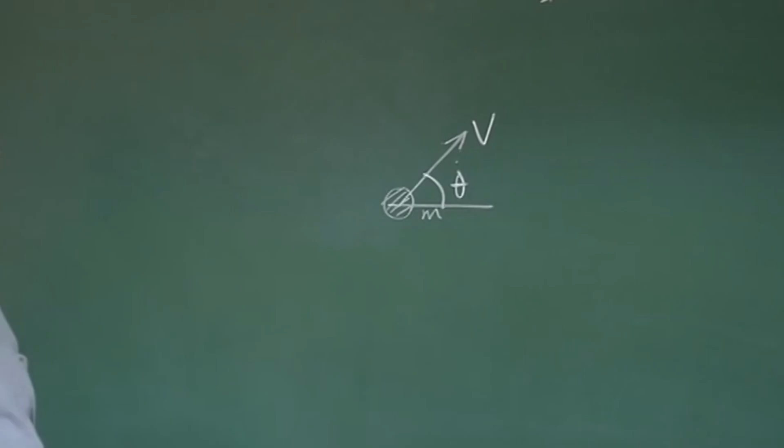Let us go back to the fundamentals, whatever we have learned in class 11th or 12th. If there is a body of mass m, and if I eject it with a velocity v at an angle theta, I know that this is typically an example of a projectile in motion. You can draw this path, and we say the projectile or mass will follow this path. This is typically a projectile motion.

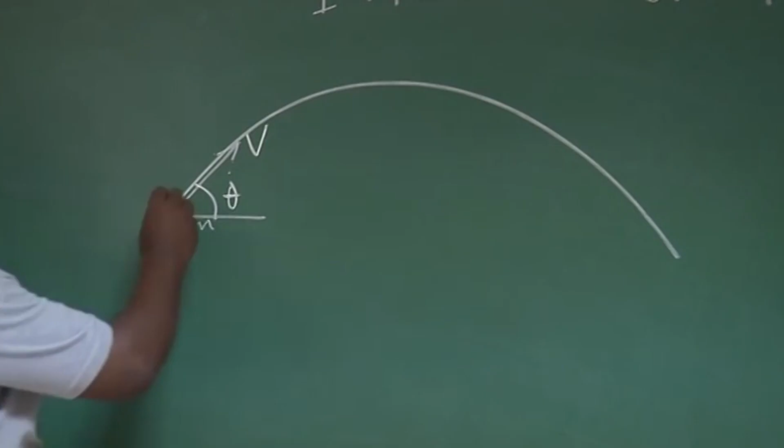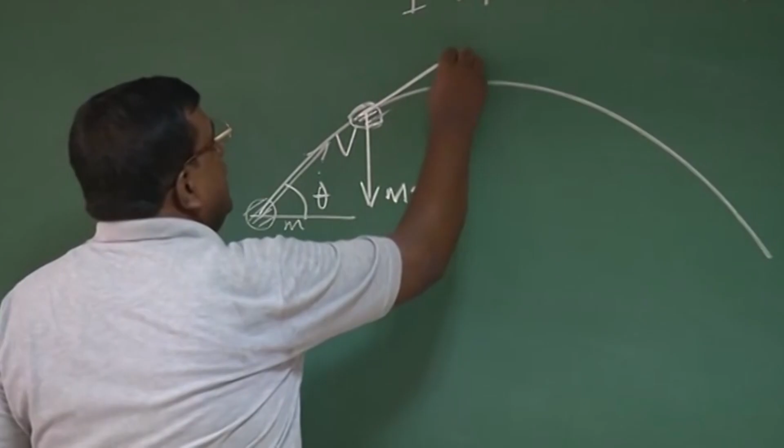What actually happens here? As I launch this body, there is gravity, which is mg, which tries to pull this body, and this body has a velocity v. What is the effect of this force on this velocity? Let us again go back.

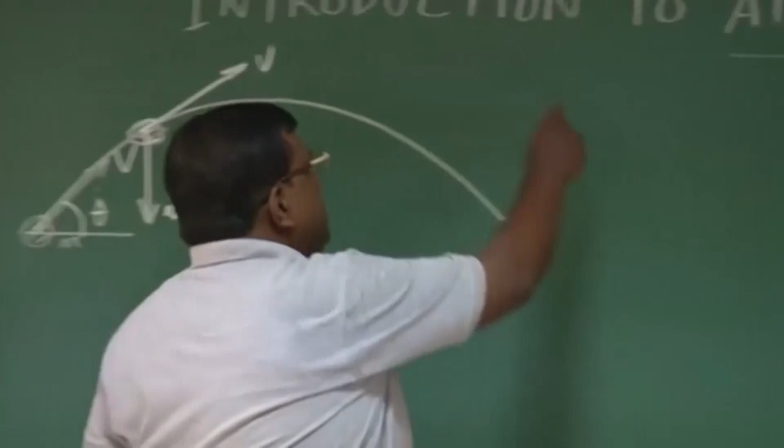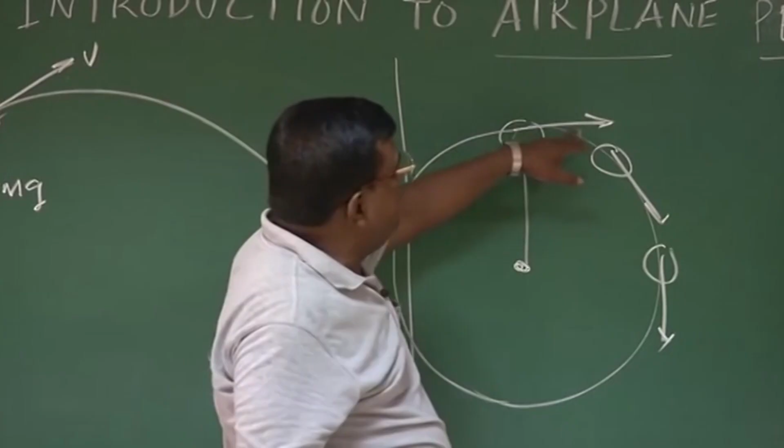A very popular example: when I move a stone using a string, you could see that this body will move in this direction. What is happening? The velocity vector, this velocity direction, is changed. And who changes this direction? The tension in the string.

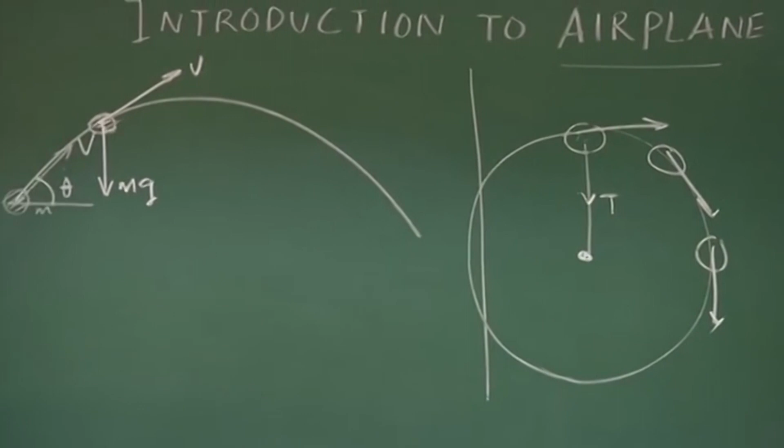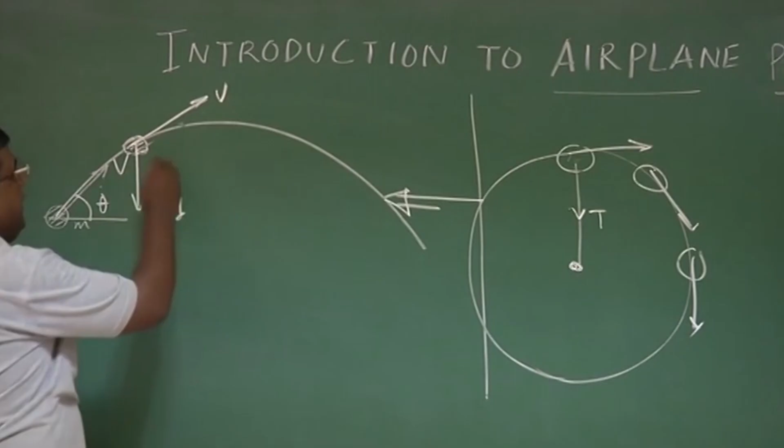So now, if I again come back: there is a velocity vector and there is a force, gravity force, pulling this body down. So you expect, as happened here, the velocity vector changing direction, and at some point it will hit the ground, right? But if I want to design an airplane, I do not want this scenario.

What do I want? I want it should go something like this, sustain for some time, and come down. This typically is the motion I will look for in the body. If I want to do like this, what should I have?

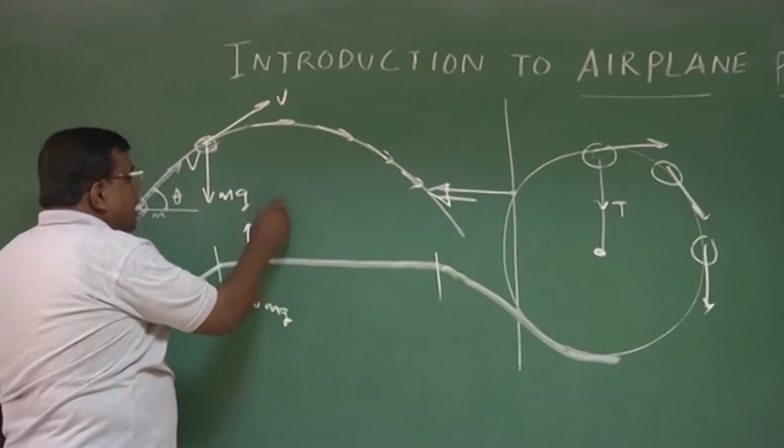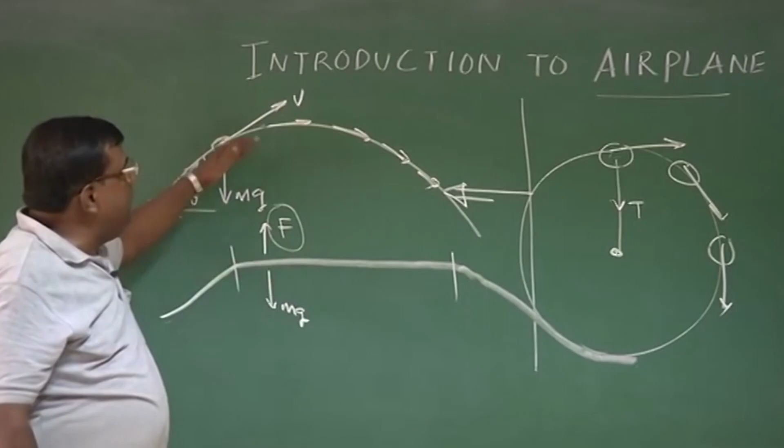Whatever gravity force is trying to pull this velocity vector, I need another force which should counter this velocity or counter this gravity force, right? Somehow I have to generate this force. If I could generate this force comparable to that force, then the turning of this velocity vector will be minimal. And if I balance it, then there won't be any turning. It will go straight, right?

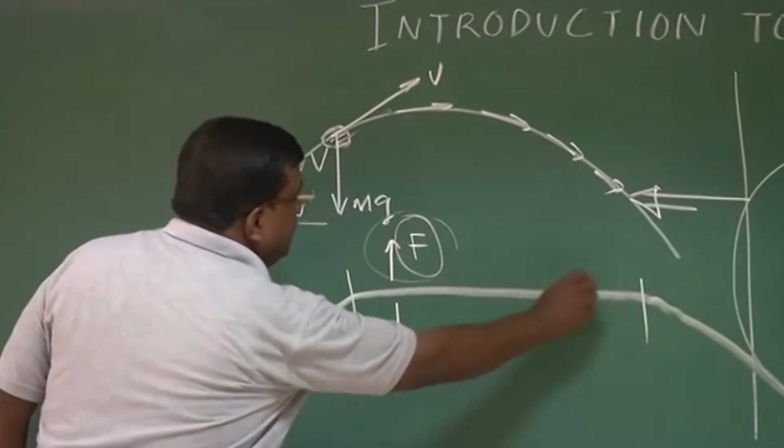With this idea, to generate a force so that I can move for a longer distance, initially the concept came: if this is the body, I put some blade here, some propeller, and that propeller will generate force, and this should be able to compensate the gravitational force, or force of gravity, acting on the body of mass m.

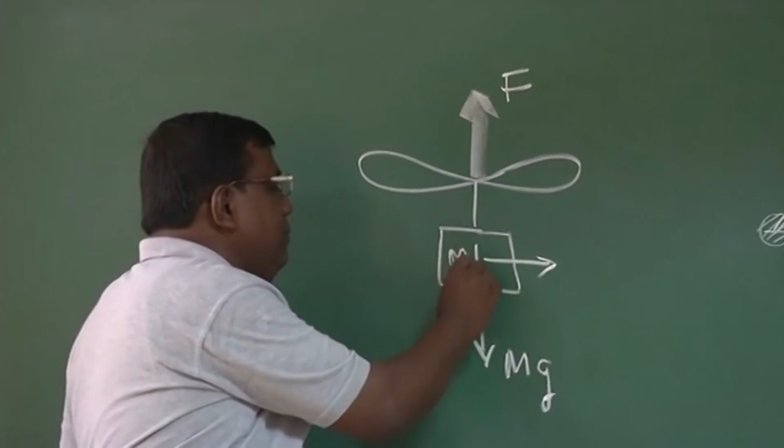This is typically the concept behind what? This is the concept behind designing a helicopter. Okay?

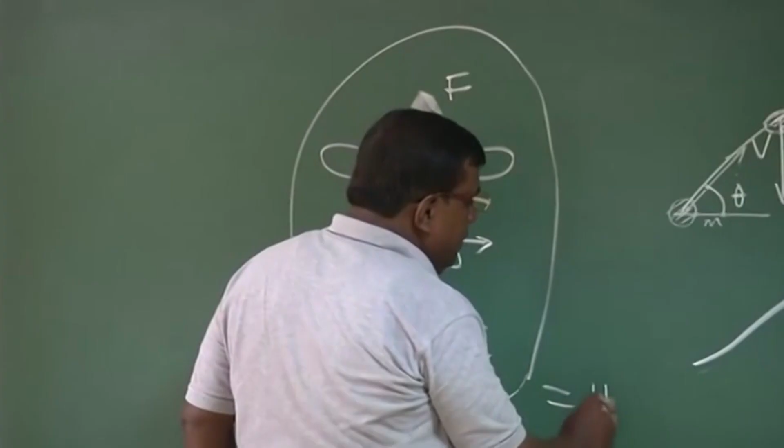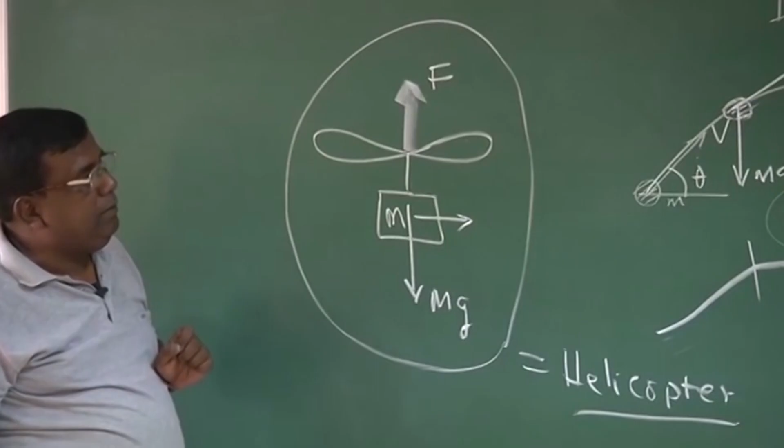But for most of this course, when we talk about airplane performance, we will not be talking about helicopters. We will be talking about fixed wing airplanes.

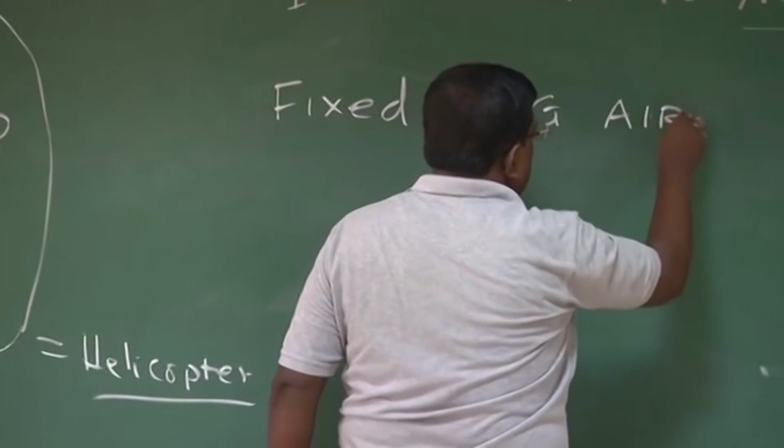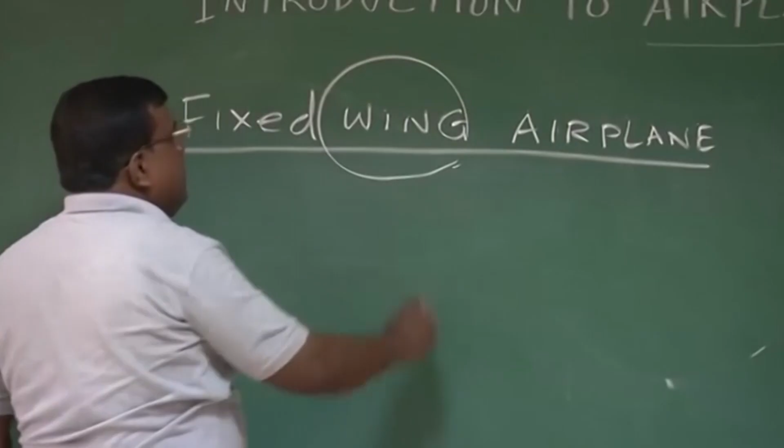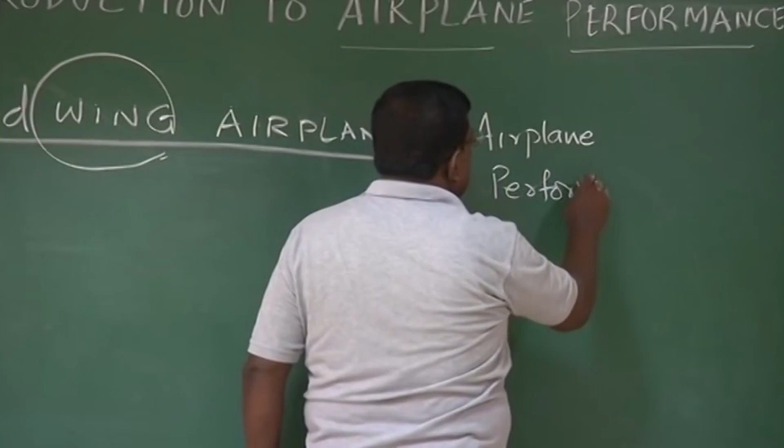We will be talking about fixed wing airplane. So we have now introduced another new term, wing. So we have got three terms. One is airplane, another is performance, and third one is wing.

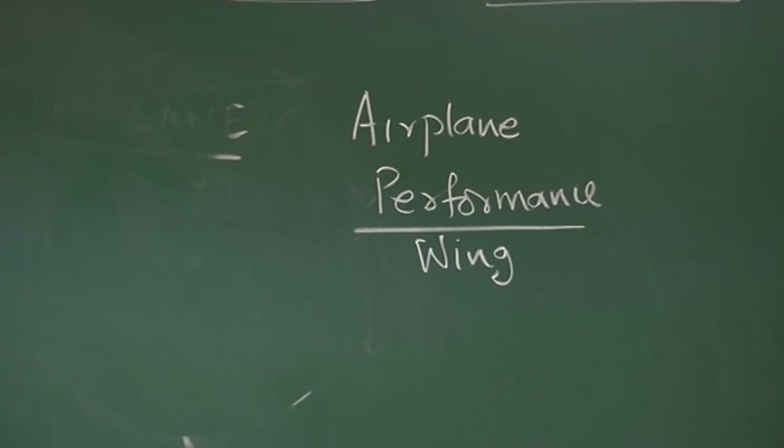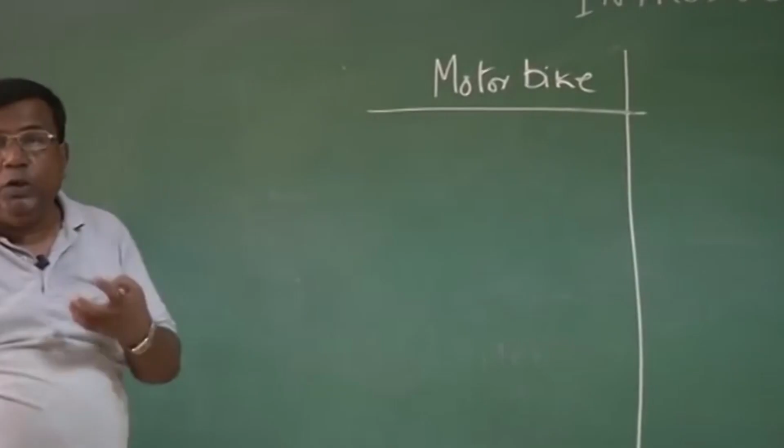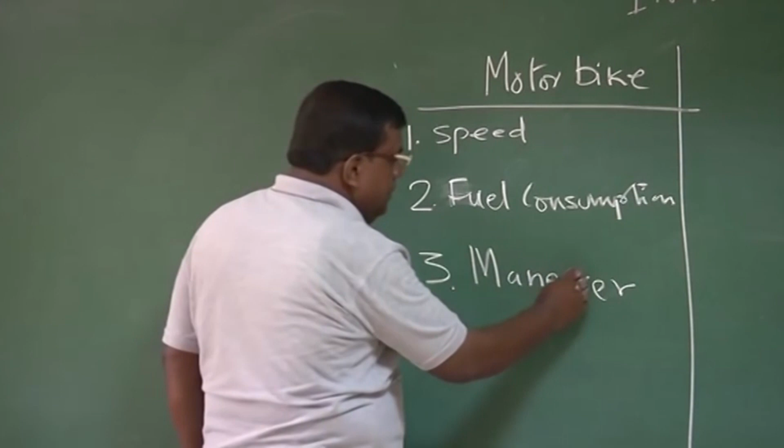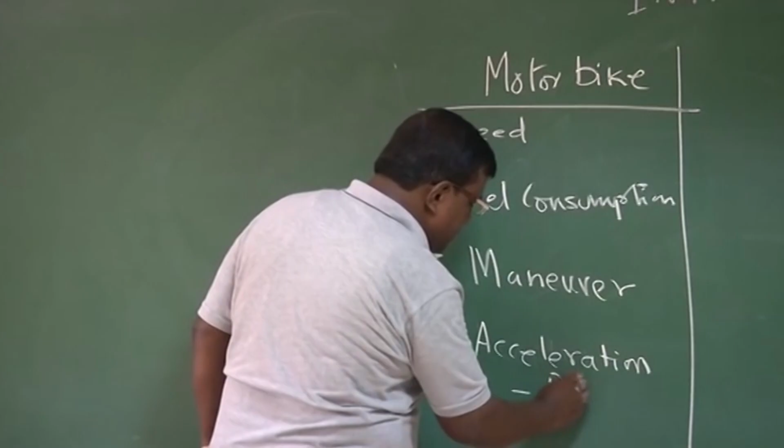Let us first see what do you understand by the term performance. Let us think, suppose you want to buy a motorbike. If I want to list out the performance of a motorbike, what we should look for? Number one, its speed. Second, its mileage, or we say fuel consumption. Third one, maneuver, fourth, the young man will like the word pickup, how fast it can speed up. And of course, most important thing, cost.

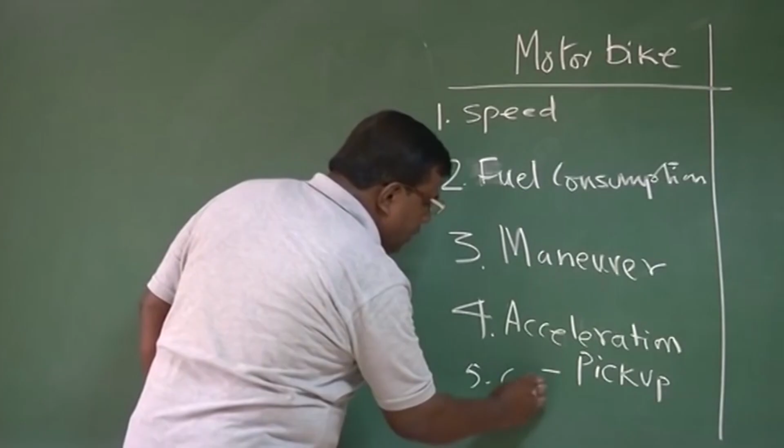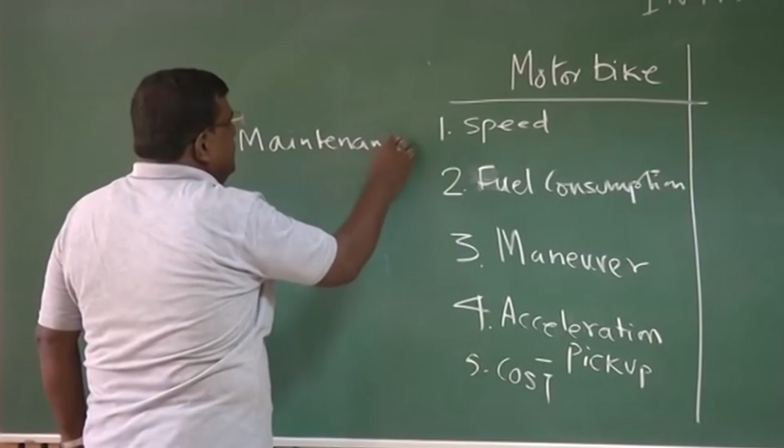And if I add few more, I would like to see this maintenance aspect. There could be many other performance parameters a young man will try to look for.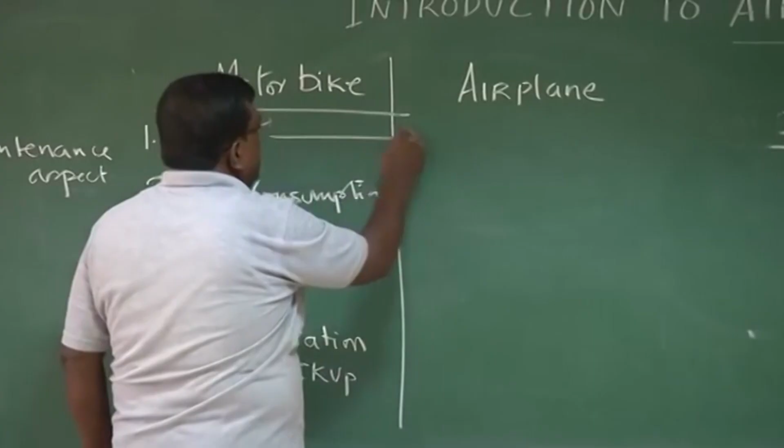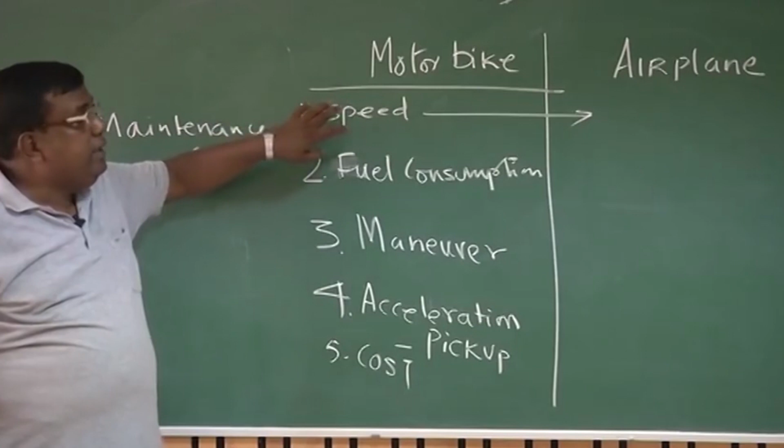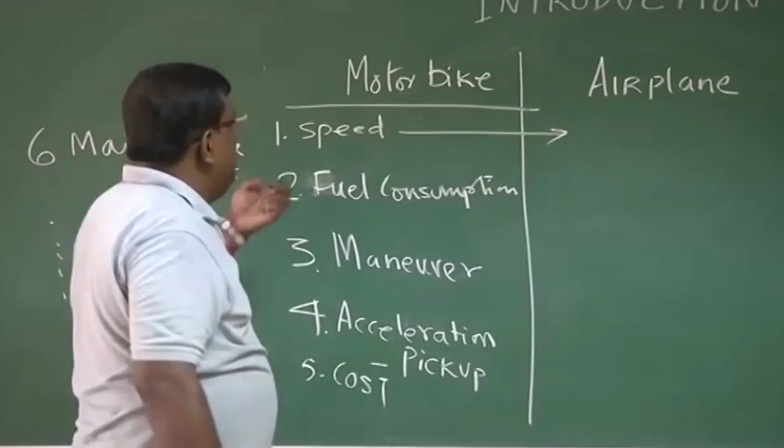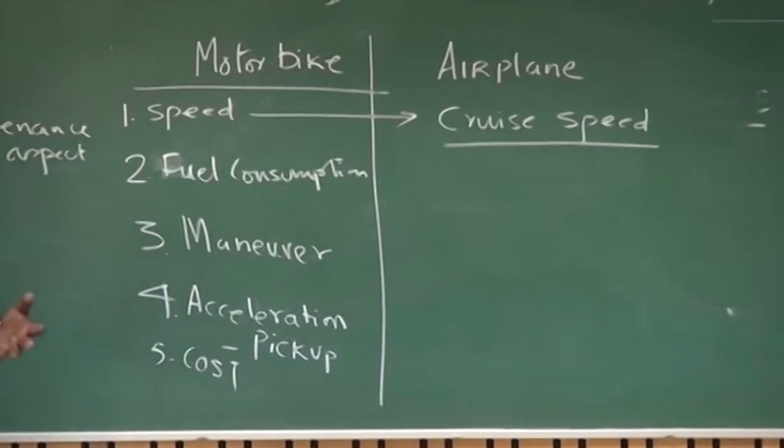If I now translate this into airplane, how do I translate this requirement, performance requirement of speed for an airplane? For a motorbike, we will be telling what is that speed at which I get the maximum mileage, and the fuel consumption is minimum. I can also ask myself, what is the maximum speed I can run this machine, drive this motorbike? Similarly, for an airplane, I will have a similar question which I called cruise speed. That is, what is that speed at which I can efficiently cruise from one point to the another point in air? We'll explain you what is the meaning of cruise.

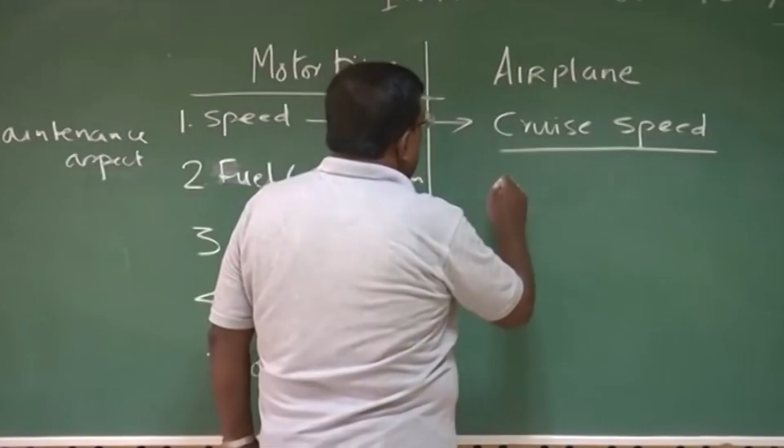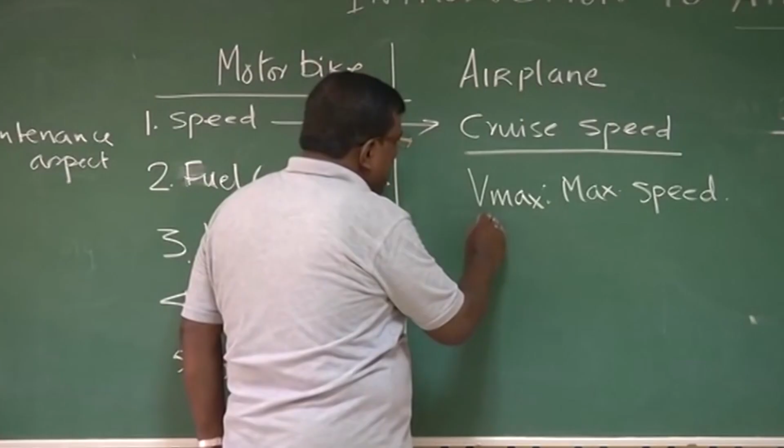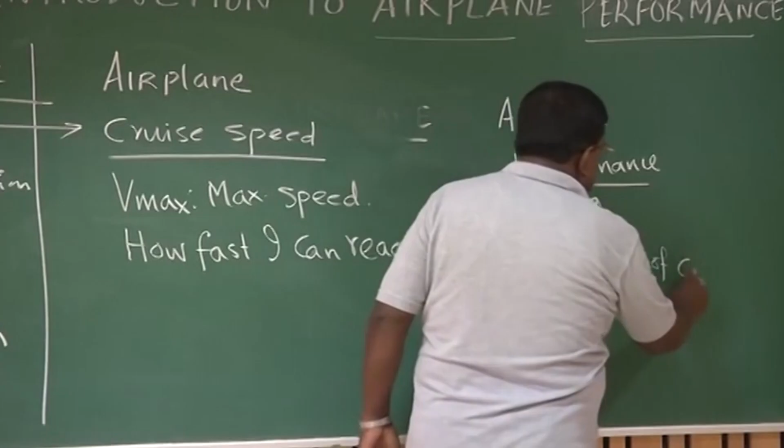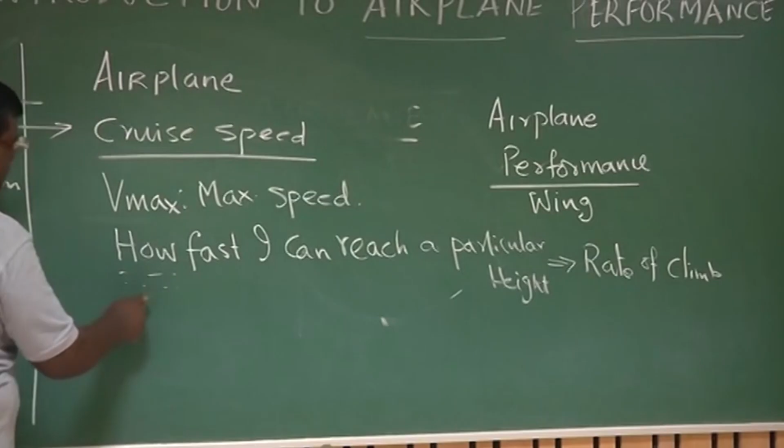We can also think of Vmax, that is, what is the maximum speed. Then for an airplane, I can also say how fast I can reach a particular height. Loosely, I will be calling it as rate of climb. There will be many such questions will come to our mind as we evolve this course.

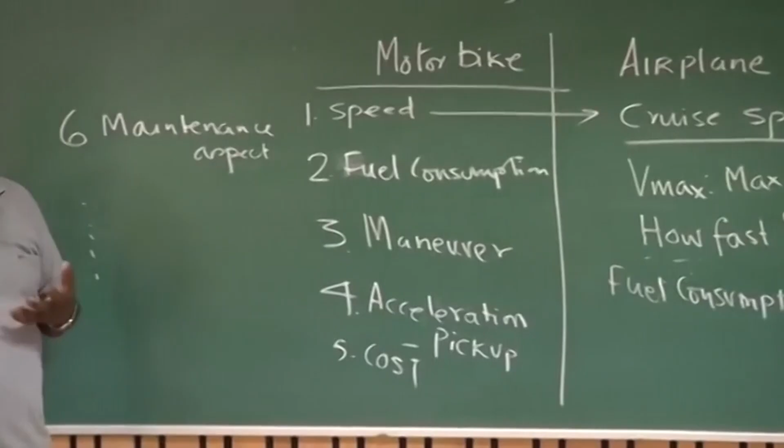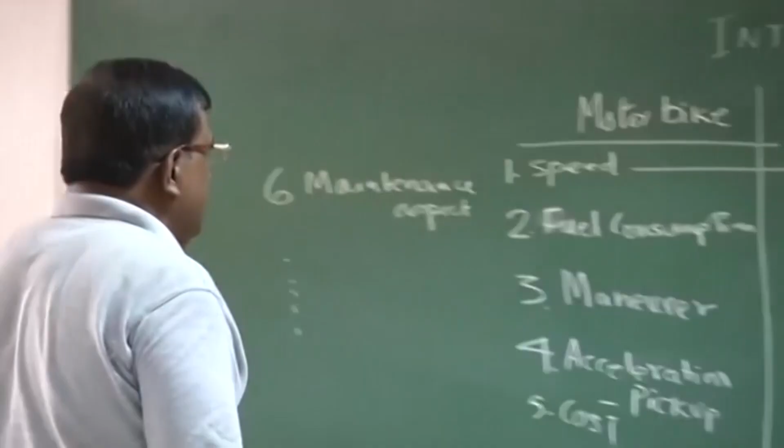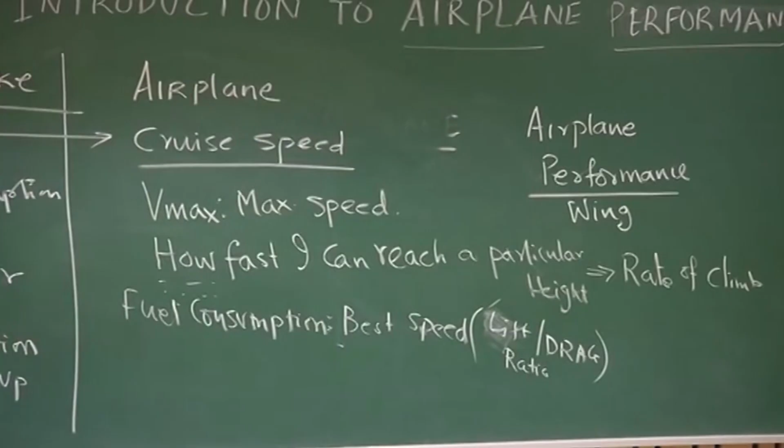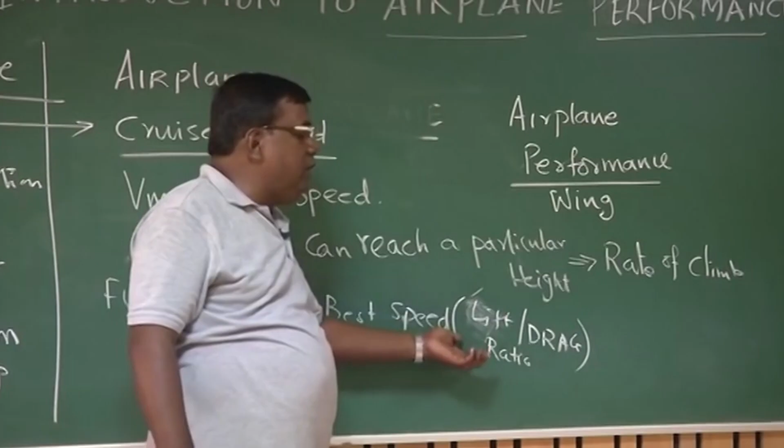Now, when coming to fuel consumption, for an aircraft, think of a motorcycle or a car. If you want to have a best fuel consumption, then there is a defined speed. At that speed, if you drive your machine, you get the best fuel consumption, or the minimum fuel consumption. Similarly, for an aircraft, from fuel consumption point of view, you have a best speed. Loosely, we'll talk about some ratio called lift to drag ratio. Meaning thereby, if I really want that my fuel consumption should be low, I need to fly at a particular speed which will correspond to one of the typical lift to drag ratio, which we'll be discussing as we progress.

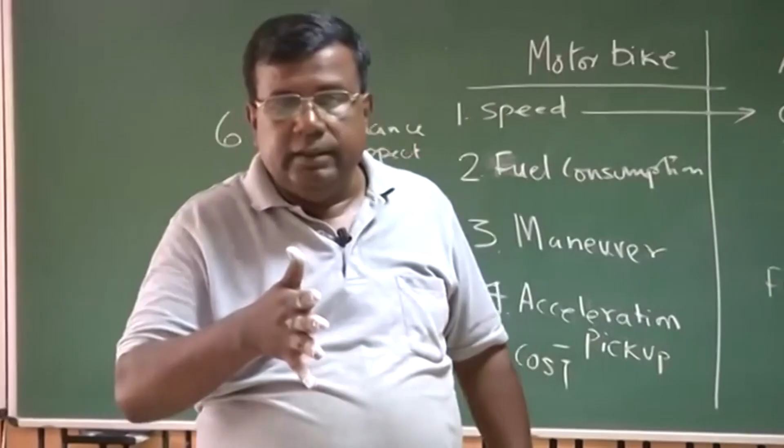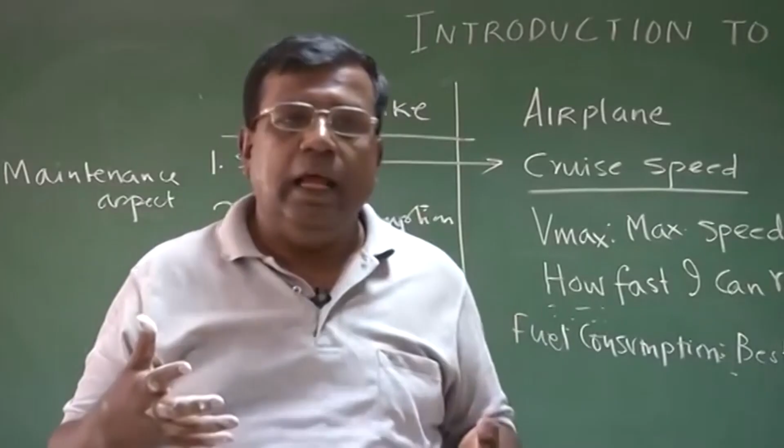As far as maneuver is concerned, for the motorcycle maneuver, you mean you are going straight like this, bank, the motorcycle take a sharp turn, like a young man or a young lady will do. For an airplane, the maneuver, typically you mean I'm going like this, now I have to take a turn, I bank the airplane and take a turn, I can do the pull-up, I can roll, all such things I should be able to do, and they should be pre-specified. And this acceleration, pickup, all are linked to this maneuver.

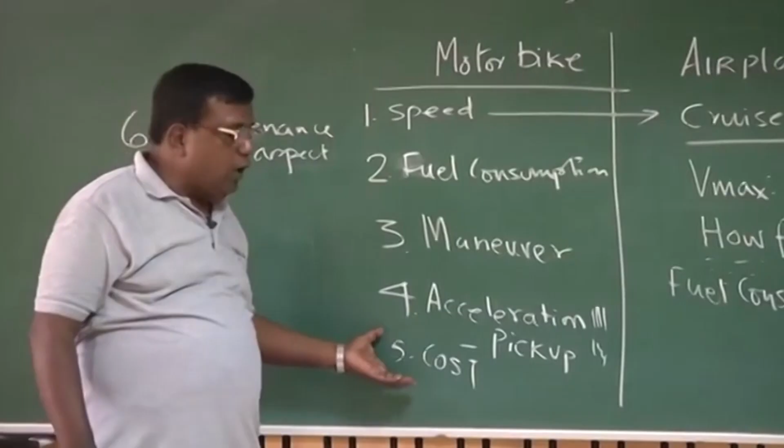Finally, it comes to the cost. Cost is a deciding factor, depending upon how much you can sell out and how efficiently you can sell it out, how efficiently you can use your money for a particular mission requirement.

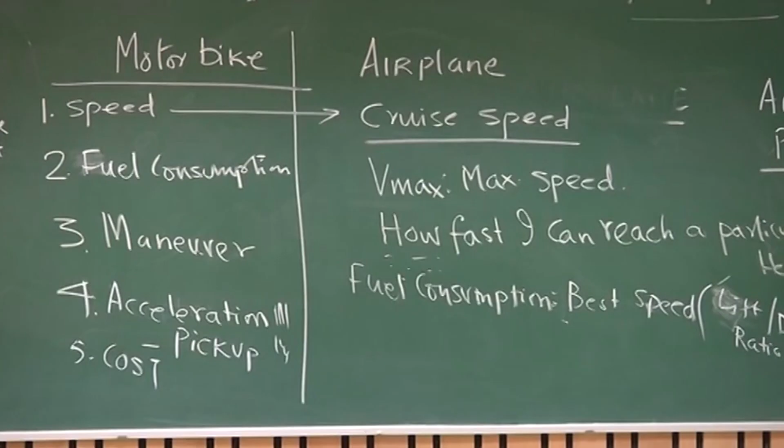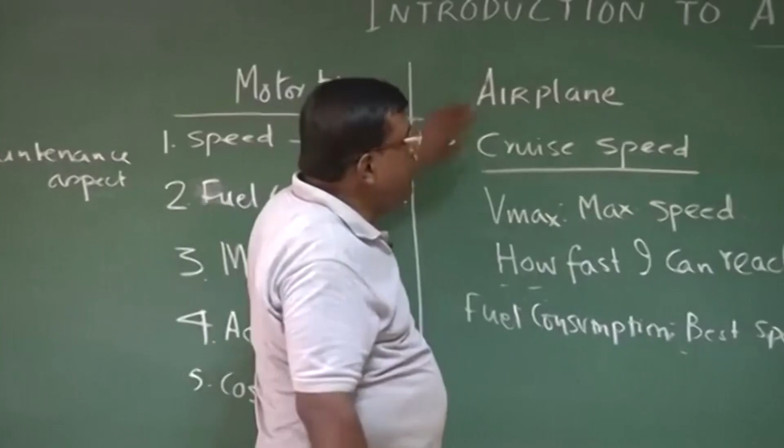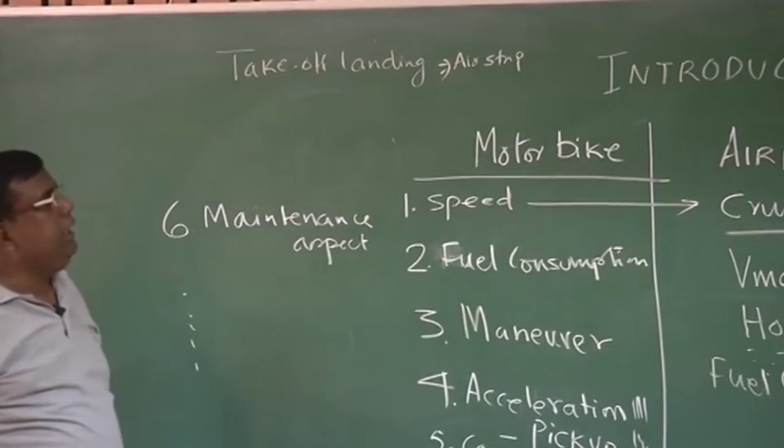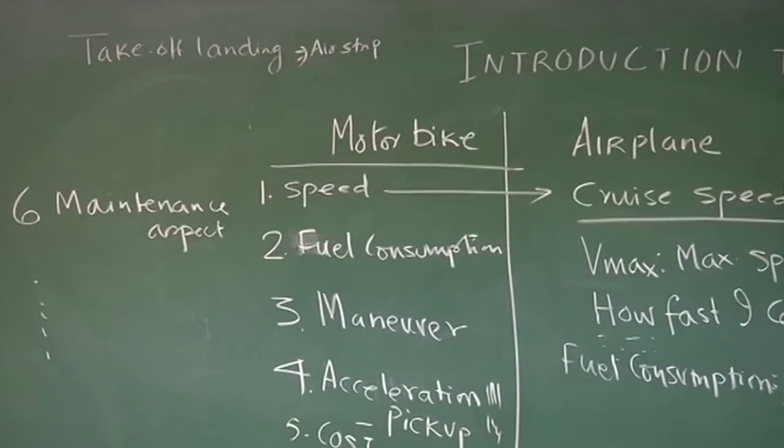Because do not forget, motorcycle you can drive in any type of road conditions. For an airplane, depending upon its weight, depending upon type of airplane, you need an additional thing called a takeoff distance. You need a takeoff or landing airstrip. For takeoff and landing, you need to have an airstrip dedicated, made for the airplane. It needs sufficient length for takeoff, and also for landing you need sufficient length. You may have a big airplane, but you may not have an airstrip. So for you, that airplane is of no use because you cannot take it off or land it.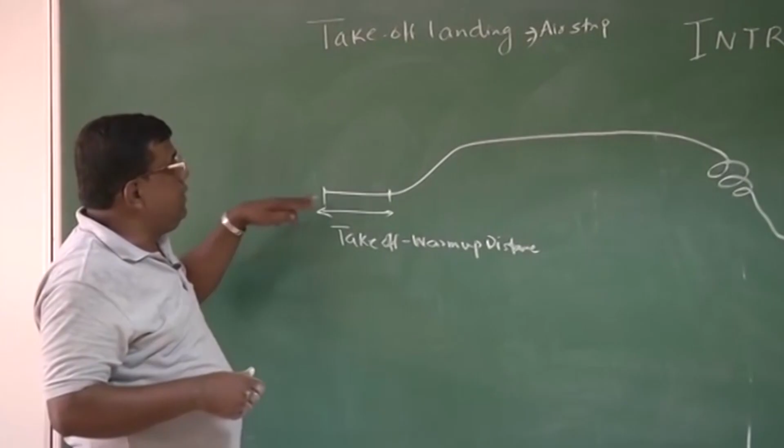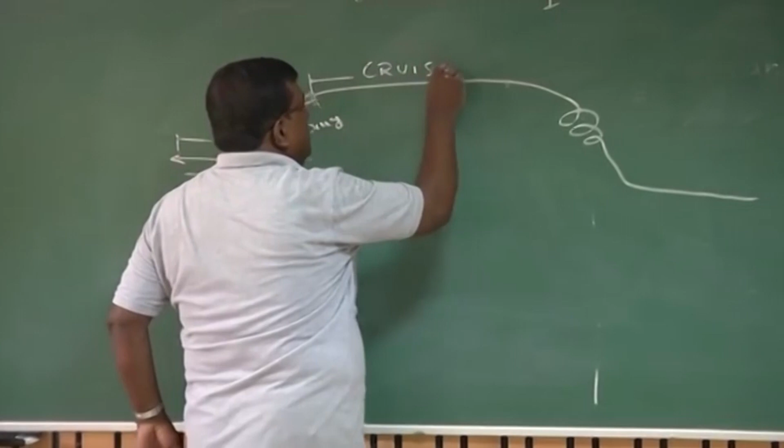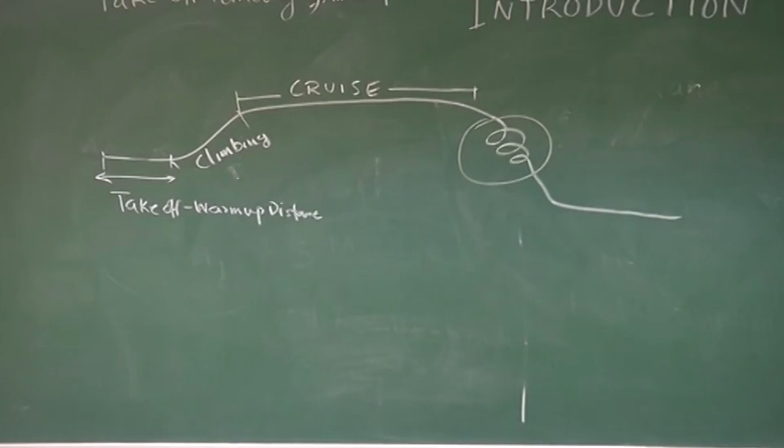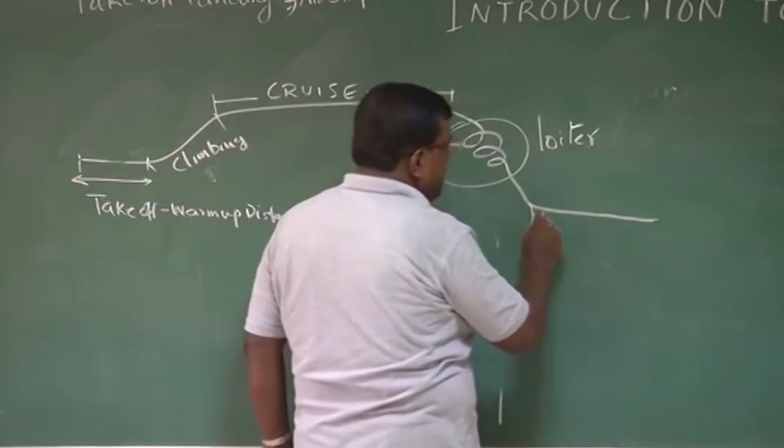That is, I'll be switching on the engine, doing taxiing, then I'll start increasing its speed. After certain speed, I'll start climbing. I go like this, I roll the plane, start climbing. So this phase is basically climbing. And this is where we're talking about cruise. This is where, suppose I am over an airport and there is no space on the airstrip, so what do I do? I need to loiter. I need to stay at particular altitude and loiter till air traffic controller gives me permission to land, and then I land. I need minimum distance so that once I apply the brake, the aircraft comes to a stop.

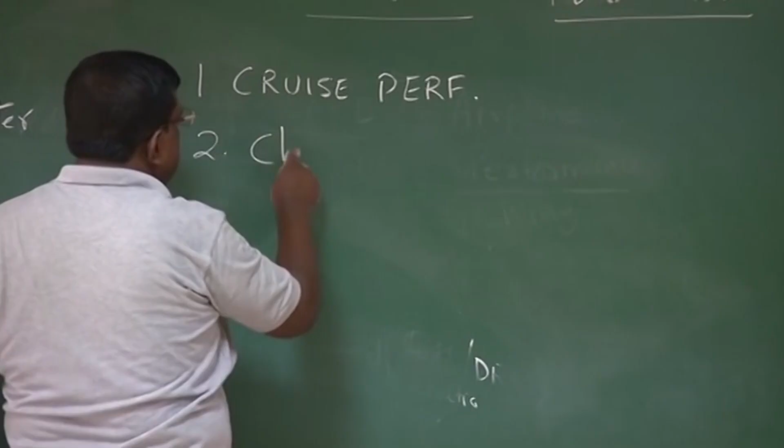So in performance also, first thing we'll be doing the cruise performance. Second will be climb. Third, maneuver. Fourth, landing. In cruise performance, we'll be also talking about range, then endurance.

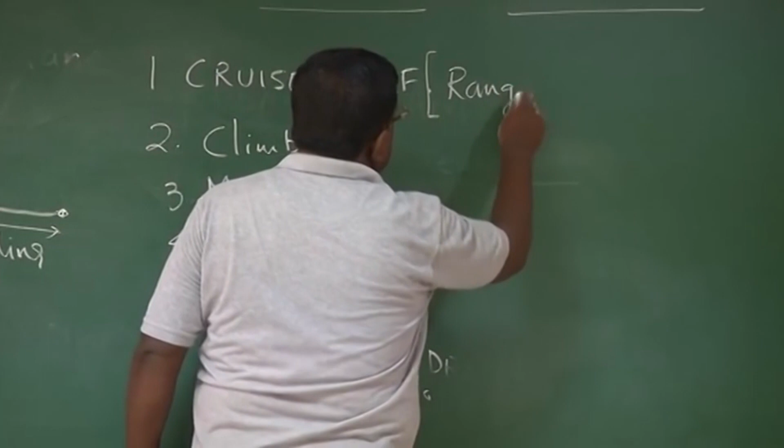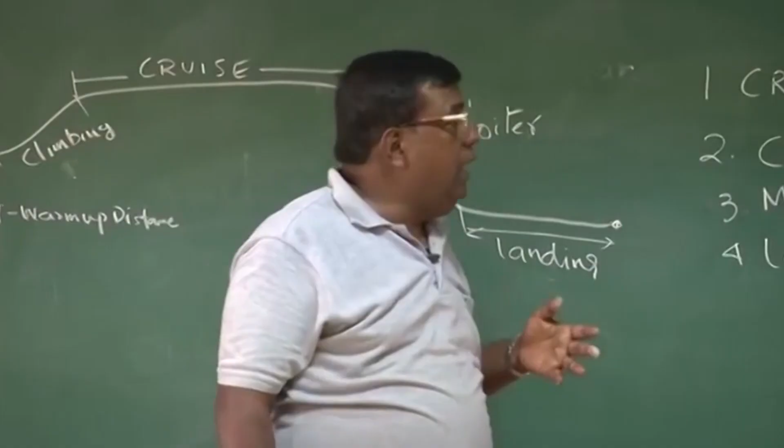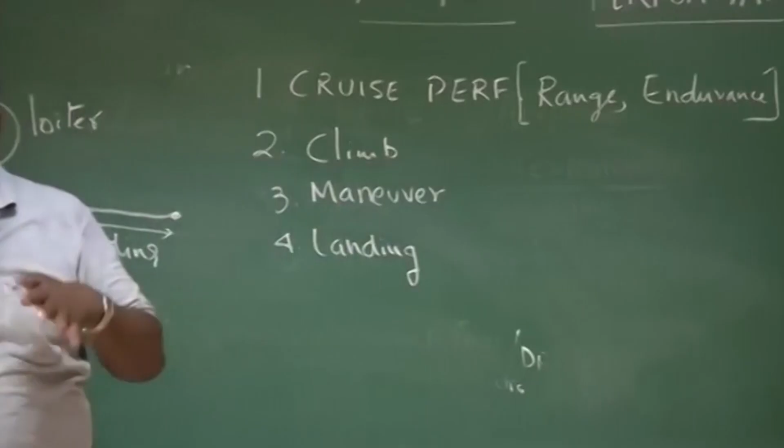Loosely, what do you mean by this? Range is, given a tank of fuel, how long I can fly in air, in terms of distance. And endurance is for how long in terms of time, for a given tank of fuel, I can be airborne. Climb, you know that for a particular height, how much time I need to climb that altitude. What is that best speed at which I should climb? Maneuver, what sort of turn rates, what sort of pull-up I can do. Landing, what is the landing distance I need to have to land the aircraft safely.

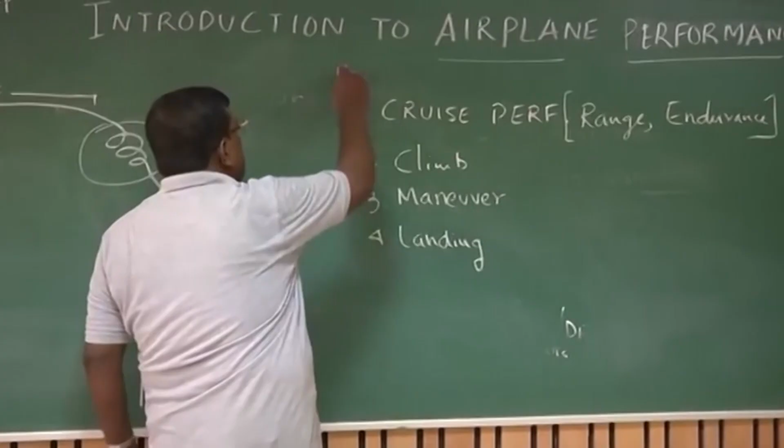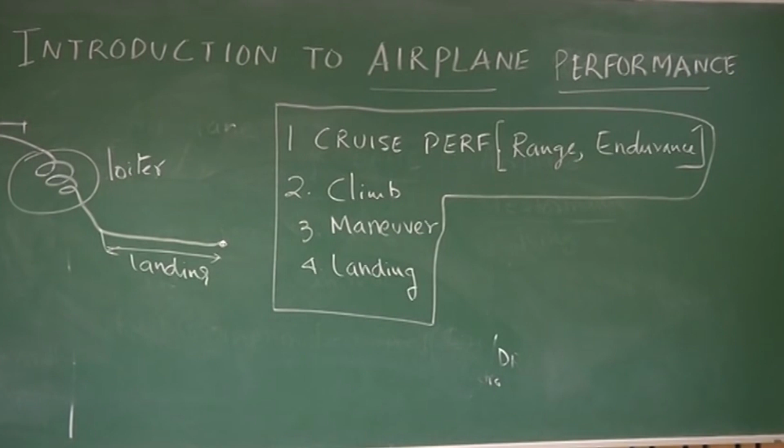So in my lecture, we'll go along with this as a guideline. But before we take up these things in detail, we'll first go into simple concept, how does an airplane fly?

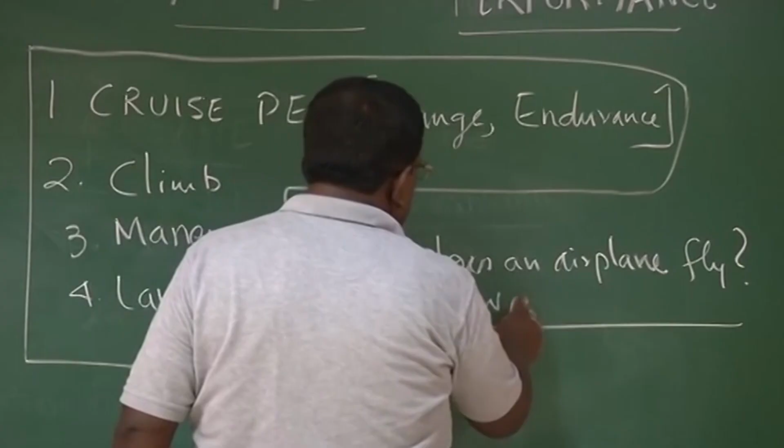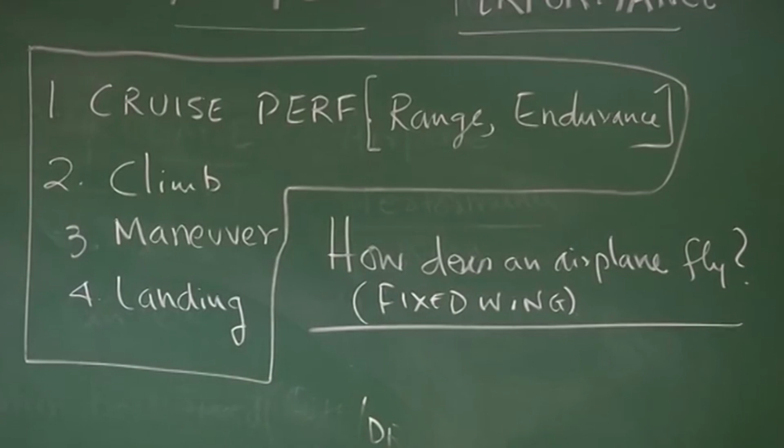Airplane means fixed wing. Talking about fixed wing. One word of caution to you is that we should not try to see how a bird flies. So it's not we are going to relate how a bird flies to how does an airplane fly, a fixed wing airplane fly.